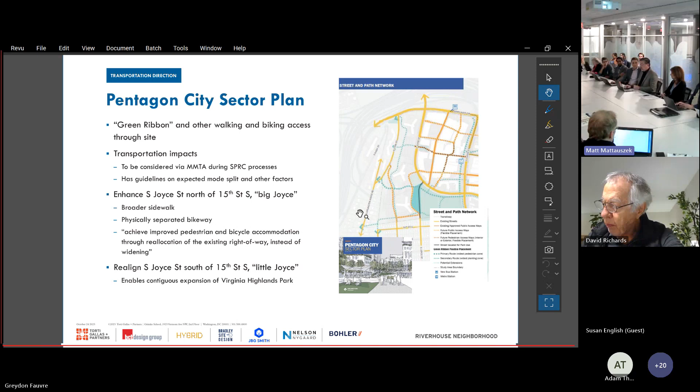I want to note, for folks used to discussing transportation impacts, we're talking about the MMTA, the document describing those impacts and how to mitigate them. The sector plan delineates that that is for the SPRC process. That said, we conducted an MMTA for this entire site because it's a large site—we needed to consider the impacts holistically, and you'll see some implications of that in just a moment. Next slide.

We did counts originally for this project, meaning we had people go out and count the number of vehicles on the street and entering and exiting each RiverHouse driveway, as well as people on foot and on bike, though we're focusing on vehicles here. We did those in 2019, and those continued to show the significant trend the county had documented through 2015.

The county thought it was important to look at more recent counts to support this analysis. So last month, post Labor Day in 2023, post Amazon's return to office, post COVID if that's a thing that exists, we were out in the field doing counts, and they show a continued decrease, in fact, from 2019.

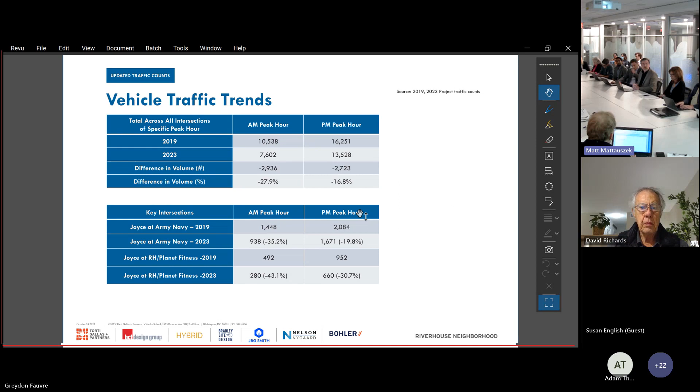The lower box shows for two specific locations - the intersection of Joyce and Army Navy, and Joyce basically at the Planet Fitness across from RiverHouse - even more significant drops, both in the AM peak hour and PM peak hour, ranging from about 20% to more than 40% lower. That's from 2019 to 2023 alone.

Why is that important? Because, as I mentioned, the sector plan guidance calls for looking at the reallocation of street space along what we're calling Big Joyce Street, the segment of Joyce from Army Navy down to 15th Street. The sector plan called for an improved sidewalk, and importantly, a protected two-way cycle track.

We've largely achieved that in this proposed design through the reallocation of existing right-of-way. Not entirely - there is additional right-of-way required on the RiverHouse side - but by reallocating street space, limiting the number of vehicle travel lanes from 4 to 2, along with a center turn lane where needed, we've managed to accommodate the cycle track and other improvements.

You see in the graphics there, reducing the crossing distance for people trying to cross Joyce Street in front of RiverHouse from 52 feet to 32 feet. That's a significantly safer condition. It's also safer because rather than having to cross 2 lanes in each direction of moving traffic, where one car yields and the other doesn't, we avoid those dangerous and speeding conditions.

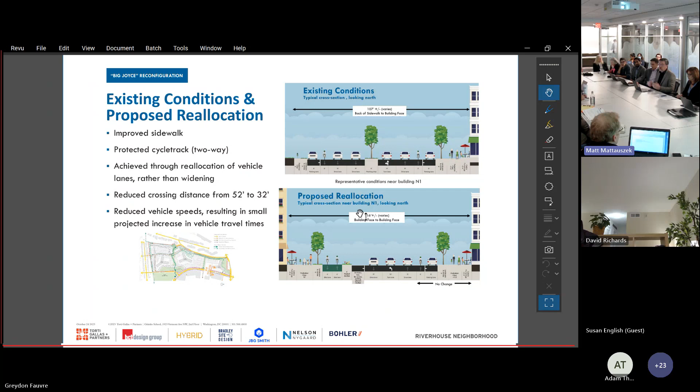The results of our analysis, which used the counts I described and also incorporated all the proposed future sector plan growth in Pentagon City and the proposed future RiverHouse growth, showed that this traffic condition can be accommodated with reductions in vehicle speeds and small associated increases in vehicle travel time - but it's only a few block stretch, so we're talking about a matter of seconds.

The sector plan also called for changes to Little Joyce, as we call it, south of the intersection with 15th Street. That currently cuts off two sections of park to the east and west - Grace Hopper Park, which you're familiar with, and the bulk of Virginia Highlands.

The sector plan called for the realignment of that segment of Little Joyce, and we've accommodated that. It now would intersect under this proposal with basically 14th Street, at the Walgreens, if you're familiar with that. It reads like a driveway, but it would be aligned with 14th Street. And importantly, it enlarges the amount of space available for Virginia Highlands Park.

So what we have is a proposed design in our site plan application, but our project, RiverHouse redevelopment, can proceed with that design. It can proceed with a different design. It could proceed without the relocation of that section of Little Joyce. It could be accommodated with existing driveways and connections.

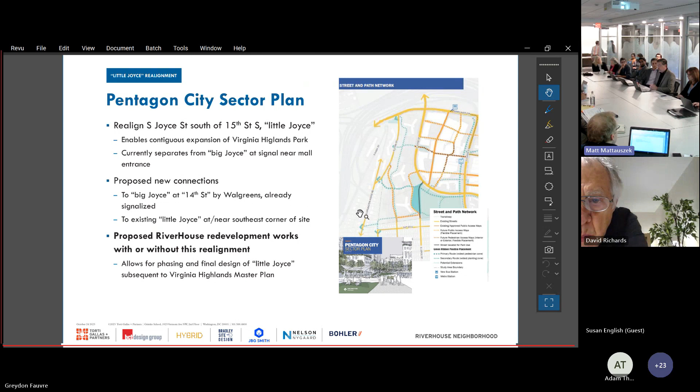So that's essentially how Joyce Street is proposed to change. Here you see the specific cross-section proposed for Little Joyce Street south of 15. So that's all focusing on the Joyce Street edge.

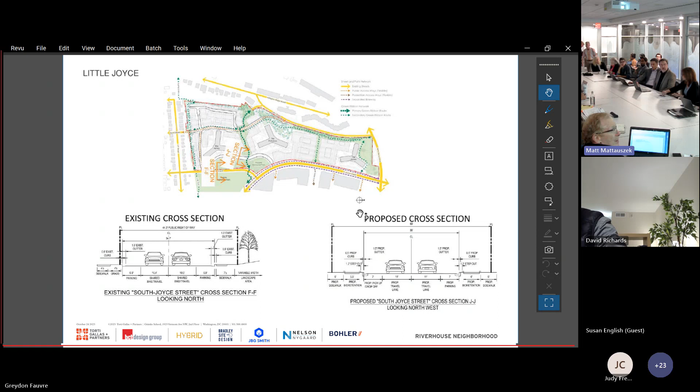Now I'm going to hand it over to Sharon Bradley from the design team to describe all of the pedestrian, bike, and other connections through the site. Thanks, Chris. That's a great segue into other aspects of circulation.

Before we get into new material, I want to do a quick recap. Last time we talked about 4 major design changes. We talked about the southern edge and maintaining that 40-foot southern setback, preserving trees and adding tree canopy to that. We talked about shifting the green ribbon in Land Bay N to more align with Kent Street. We talked about a C3 chamfer and view sheds there, and the removal of the F2 building in the far northeast.

But there were additional questions, and you asked us to study a few things further. So we wanted to dive a little deeper into those aspects today. Today we'll talk about the 15th Street spur and some of the studies we've done since then, the Lynn Street connection, which you had some questions about, and the Land Bay and open space, which we talked a lot about. So we'll go over that more today.

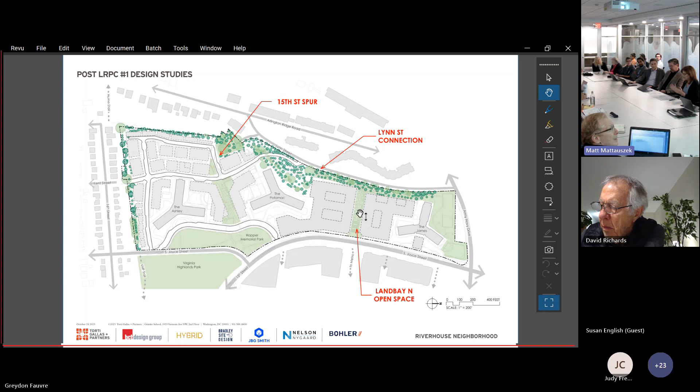So we'll start with the 15th Street spur. Our 4.1 submission, that connection offered the gentlest, most accessible route up the site, up the slope. But where it fell short was its provision for view sheds, east-west. And you asked us to explore that further to see if we can provide those.

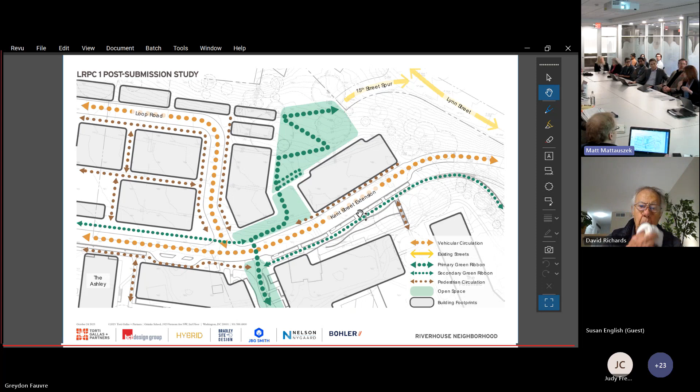So at the last LRPC, we presented a new option that did provide that direct line of sight, but the result was a tighter path that resulted in some switchbacks, which was a less graceful way to navigate that slope. So we've studied that still further, and we've arrived at an option that we're pretty excited about because it offers the best of both worlds.

So moving to Lynn Street, the Lynn Street connection. We wanted to go into a little bit more detail on how we're making that connection to Lynn Street from RiverHouse.

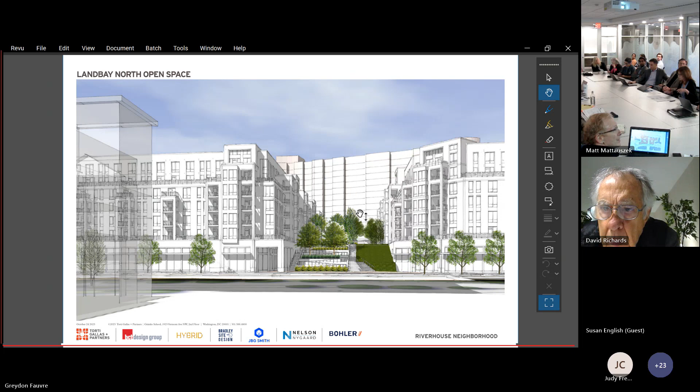The result of this, you see in plan view, is not only a change in visual character, but it's also allowing for a 50% increase in the number of people that you can accommodate in the space. You can see that the chamfer of the northernmost building aligns more evenly with the Pentagon Row buildings to the east. We're going from 67 to 97 now in that space.

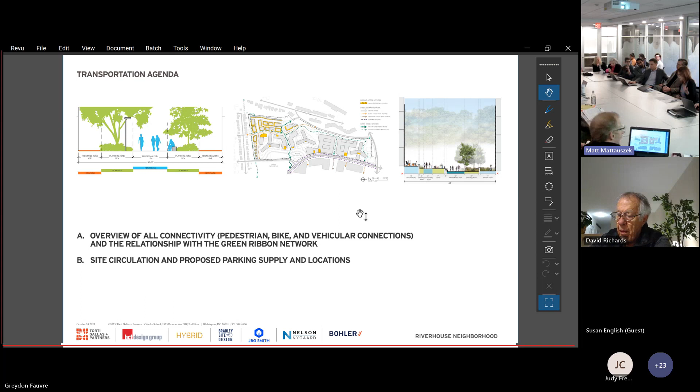So we're going to transition to transportation site-wide. What we've been talking about sets the stage for the discussion around all the transportation elements, and we'll talk more now about overall connectivity across the site. Going back out to the site-wide view, you can see how we're accommodating the sector plan requirements for both the bike and the green ribbon networks.

The plan shows how these networks lay out on the site both individually and in relationship to each other. It also shows how the transportation network is intertwined with the fabric of the open space, and specifically the green ribbon network as an open space.

We've developed the green ribbon corridors in agreement with the sector plan, and we've extracted some of the key elements from the sector plan document. As you can see, we're focused on a green ribbon that is continuous, easy to navigate, and visible. You're going to see these repeated as we talk about how we're designing the green ribbon.

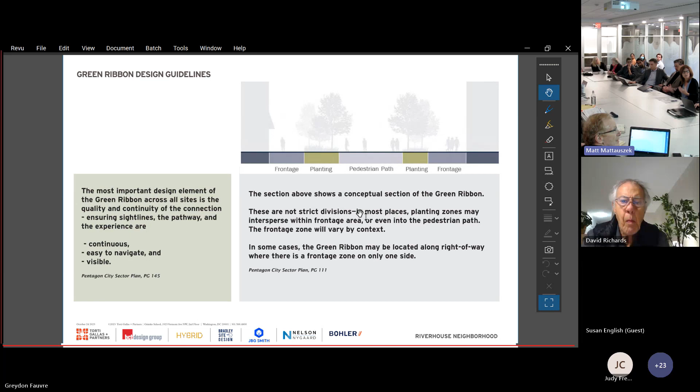We also are going to talk a little bit more about the sector plan mention that it can occur along public rights of way. That's particularly relevant tonight because we're talking about the alignment along Kent, and we know there are a lot of questions around that.

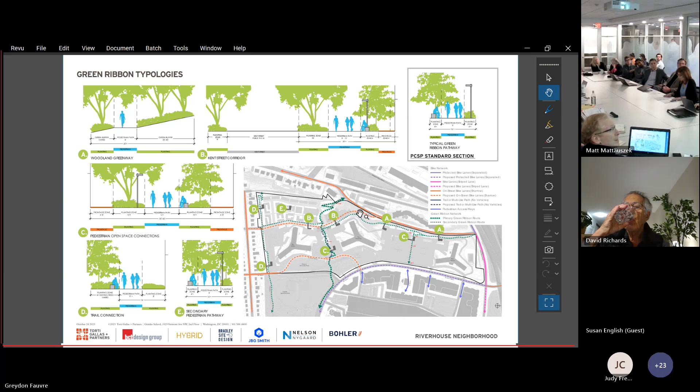Our green ribbon typologies have been developed using as guidance the sector plan standard section that you can see in the upper right. There are a lot of typologies here. I'm not going to go through all of them, but they all meet and usually exceed the sector plan requirements. I want to focus right now on the Kent Street one that you can see in section B.

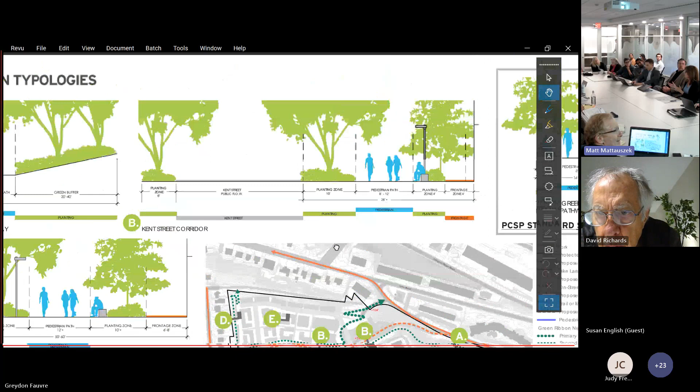The staff asked us to realign the green ribbon so it follows Kent Street. Exploring that further gave us the opportunity to provide a much larger planting zone between the pathway and Kent Street, and a more biophilic experience than you would get on a typical sidewalk.

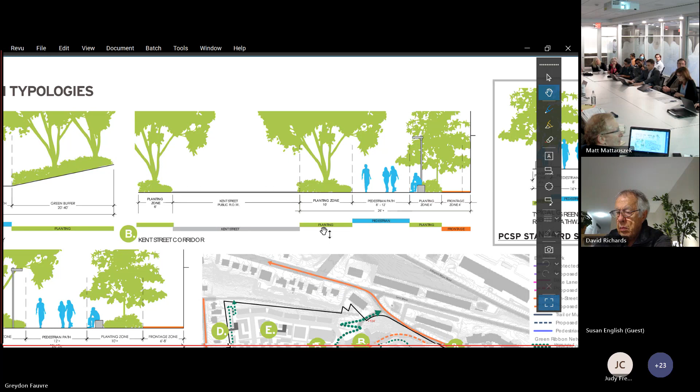The land bay is both an open space and a key section of the green ribbon. The 12-foot bikeway winds through the space and has a separate pedestrian pathway that weaves around it. It has many of the same conditions as Penn Place, so we modeled some of our design thoughts on what's happening there. We have the width to create a safe and inviting space for both pedestrians and cyclists.

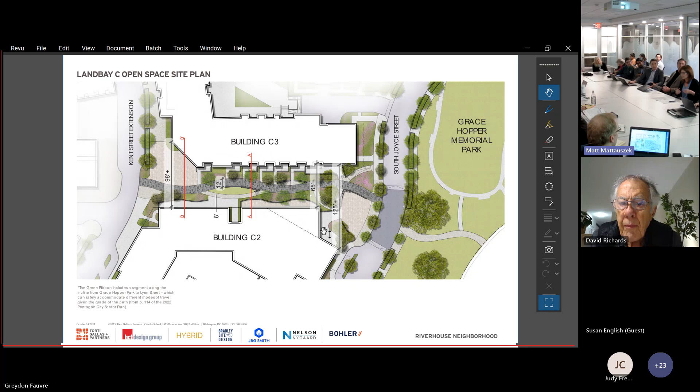Finally, these sections illustrate those dimensions and activities. On the left are the separated pedestrian and cyclist zones in the 65-foot width, and on the right you can see how open and celebratory those wider spaces can be.

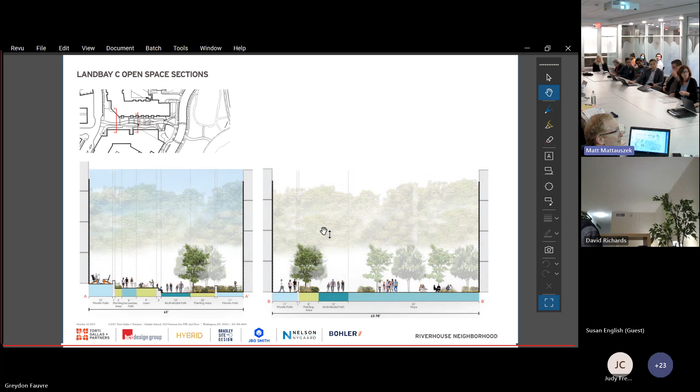With that, I'm going to turn it over to Murphy to talk about other elements of transportation. I could swap with you, sure. That's great. Again, for the record, I'm Murphy Antoine with Torti Gallas and Partners.

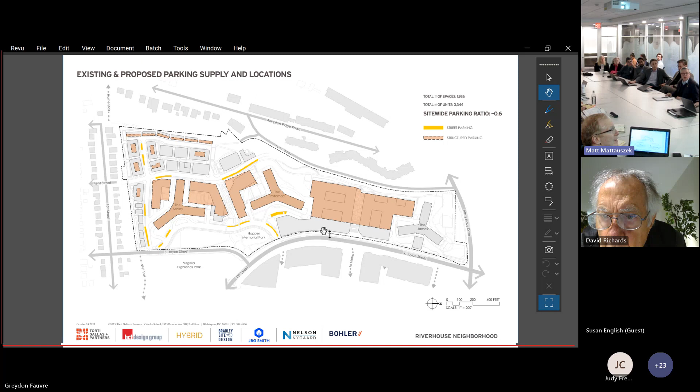In the yellow bands, you see the on-street parking in the new streets along Kent Street Extended, the townhome Loop Road, and Little Joyce. Those garages all have access shown on these diagrams with the orange arrows, into the existing parking at the Potomac and then into those garages between the multifamily buildings in the Central Land Bay and the Northern Land Bay.

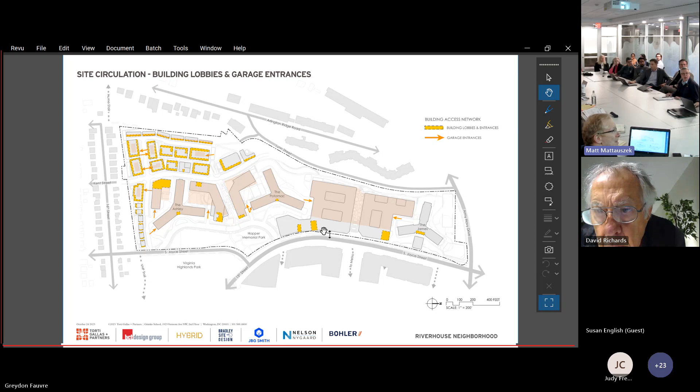On the last slide here, you'll see in the red arrows the loading access. We saw garage access in yellow arrows. Parallel to that, in most cases in the newly proposed buildings, is the loading access, separate but parallel to those garage accesses. In the existing James, Potomac, and Ashley Towers, that loading access is generally behind those buildings, in the back of the hinge.

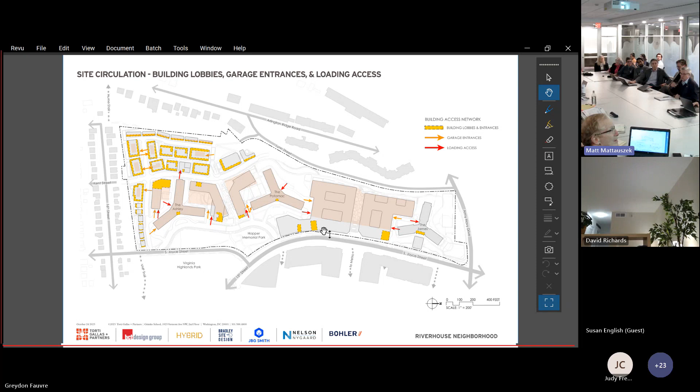Some of the slides I wanted to cover tonight involve some repeat information from the last meeting in September. Looking at the online attendance, we have some folks who were not here last month, so there's some helpful process and overall planning history worth covering before we get into the issues, the review, and next steps.

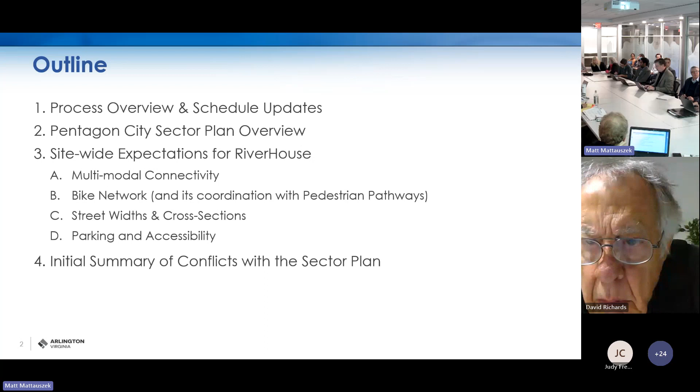I wanted to cover a couple of minor changes from the process slide we looked at last month. The more we peel back this very dense project, the more we learn about the structure of conversations that need to happen. It's also really informed by the feedback we received—a lot of comments and feedback that continue to inform the sequencing of meetings, the sequencing of topics, and help organize this very large application.

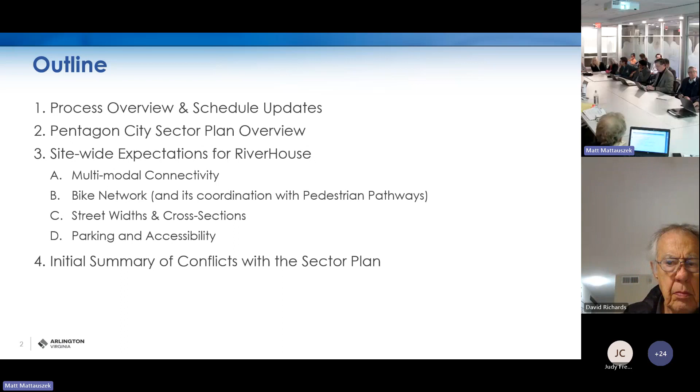For tonight, mirroring what you just heard from the applicant, we wanted to focus on transportation. There's some overlap with public access ways and the Green Ribbon Network discussed last month, but clearly a different set of challenges and elements to review as we focus on accessibility, the street alignment, where parking might be, and really the multimodal character of this property.

This is a long process. We're beginning with the long-range planning committee, which allows us to look at site-wide elements. If we have a productive conversation and feel we're in a good place regarding where the parks, buildings, and streets are generally located, that allows us to proceed into the site plan review committee, where more detail can be focused on the specific buildings.

This is really a combination of online surveys and additional dialogues that drill down with additional stakeholders, in addition to this group, about what we want to see and what the options are for those spaces. It also takes into account what's around the block, so we're not duplicating efforts and are addressing key amenities we want to see as the site develops.

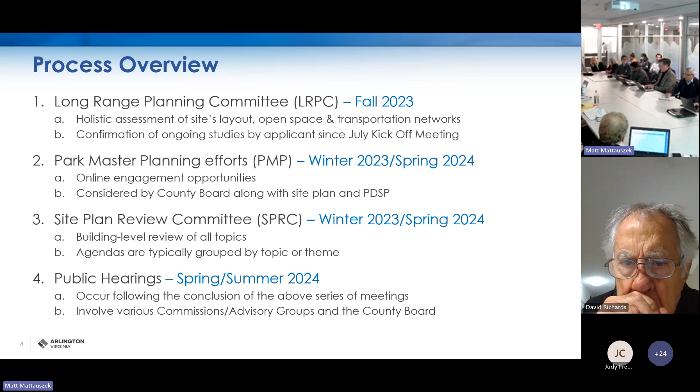Finally, at the bottom of the screen, you can see we have public hearings. This is really what we call the roadshow of commissions and committee hearings that all site plans have to go through on their way to the county board hearing, which at this point will be somewhere in the middle of 2024. But again, it's informed by a lot of the discussions still ahead of us.

We did have a visual that tried to capture all of this in one graphic, but we're getting to a point where we need to break that up into two. So for purposes of simplicity, this one really tries to get at the rest of the calendar year. What are we anticipating through the end of December?

You can see here in yellow, we're highlighting the topics for tonight's discussion, but soon thereafter, in mid-November, we are identifying an additional and what we consider a final long-range planning committee meeting, at which point all of us could really regroup and consider the feedback we received, all the different studies and where they are concluding, possibly from LRPC #1 and tonight's meeting, and really begin to start the transition to the site plan review committee.

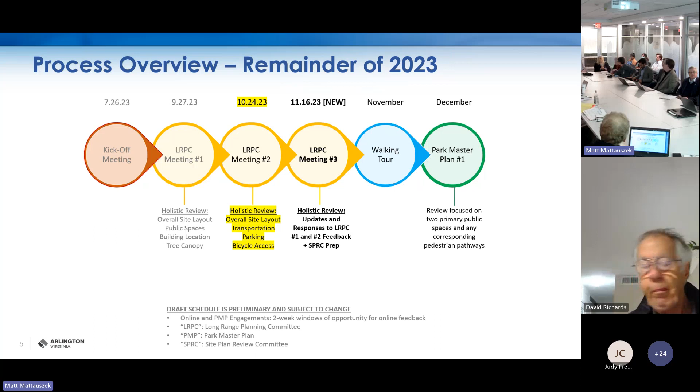So I think there's so much to cover, and I think we've heard a lot, and to the applicant's credit, they are studying a lot of these issues that we really want to have a firm understanding of, the direction we're going into, before we make that transition.

We are also targeting a walking tour of the property. Ideally, if this weather holds up, November would be a good month to schedule that. And as I mentioned, the park master planning effort could begin as early as December with our colleagues in the Department of Parks and Recreation. So that's the end of this year.

Looking at 2024, and again, we're intentionally not identifying any dates because this is still in flux. But in terms of the organization of meetings and topics, this gives you a sense of what we're anticipating, primarily driven by some of the bigger items like transportation, like public space, less so about architecture. But again, we're reviewing what essentially looks like 2 or 3 different site plans in one, because of site size, the number of buildings. So a lot of these items really have to be broken up and separated for us to have a productive conversation.

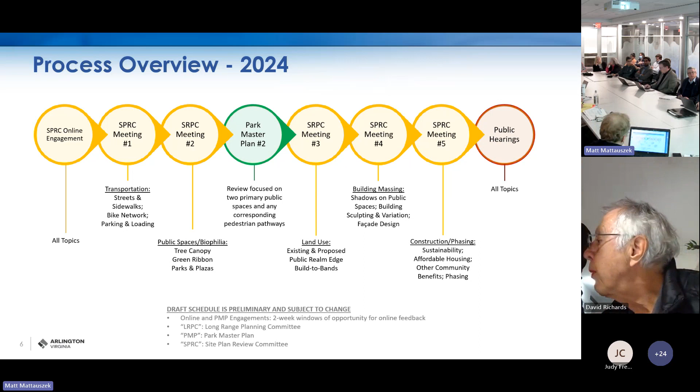Next, I wanted to highlight the adopted policy for the area, particularly the sector plan, and as it relates to this particular property. Those of you that are maybe less familiar, the sector plan was adopted in February 2022 and really sets the stage for how the county board can consider redevelopment applications that still meet the vision we've set for the property and adjacent parcels to the east. So this establishes more of a regulatory framework and conditions under which additional density could be considered.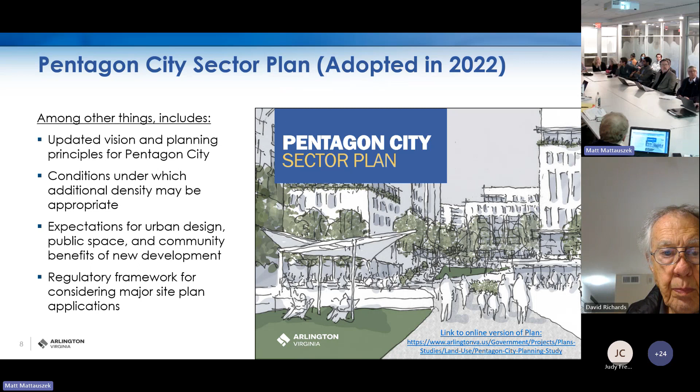We'll get to that as we progress in the slide deck. But one of the key elements we're going to keep returning to is really a set of planning principles that are embedded in the sector plan that kind of represent the livability priorities established back in 2019, if I'm not mistaken. And they really set the parameters for how we should consider trade-offs, ultimate goals and objectives for the property, particularly in areas where there might not be a clear answer.

So I think throughout the process, you're going to see us come back to these 6 planning principles and use them as a guiding light to figure out which direction we should take and how we arrive at some of these recommendations moving forward.

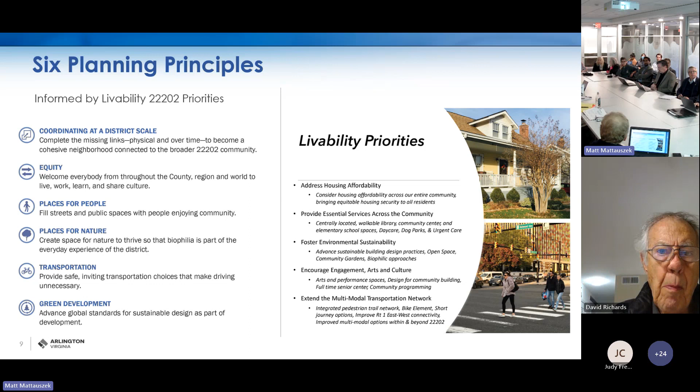The plan itself does have a development framework, which is comprised of 4 key elements. We've looked at 3 of them in the last month. Tonight we're going to be focusing on transportation, but some elements of the other items will creep in as well. This gives you a sense of that document and how it informs both the long-range planning and site plan review committee meetings, given that that's where key recommendations are embedded in terms of what growth could look like on this property.

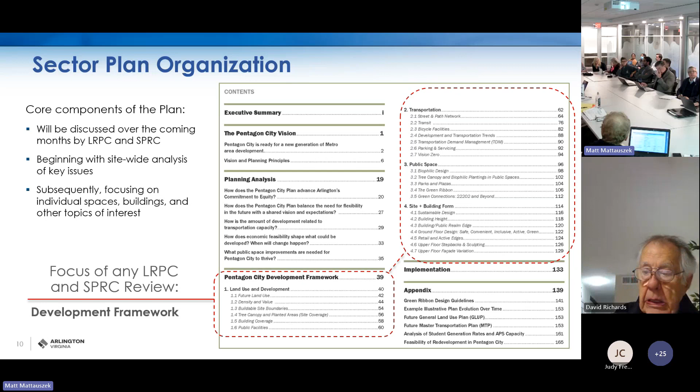As you look through what is a pretty dense document, the sector plan has a combination of illustrative exhibits that are intended to spark inspiration and give people a sense of what could happen, different ways in which the plan can be interpreted. But also, as you see on the right, more explicit exhibits that are intended to be regulatory and specifically guide the vision for each particular property. So as you've seen in last month's meeting, the exhibits we try to focus on the right are the ones that are utilized in staff's review.

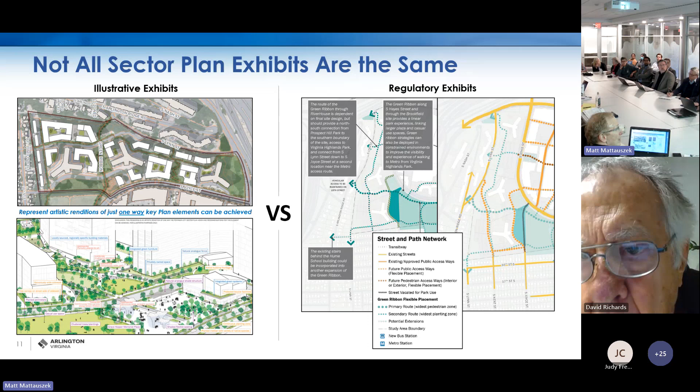Next, we wanted to give you a quick glimpse of what the sector plan speaks to with respect to transportation for the RiverHouse property. This exhibit on the right is an overarching summary of all public access ways and connections anticipated throughout Pentagon City, particularly on the RiverHouse site.

You can see here that in addition to the major arterials surrounding the property, there's a strategic emphasis on improving north-south and east-west connectivity, and doing it in a way that helps us achieve a multimodal success story that allows people to not have to rely on cars, even though cars will have a path to navigate through and around this property, but making sure that whether you're using a bike, walking, or using micromobility, there's a convenient way to get across.

Reach your other destination, and do it in a safe and convenient way. One of the things we continue to highlight is really how these public access ways become intuitive, either through safe lighting, signage, and having a straightforward approach to the alignment that connects some of the key destination points in and around RiverHouse.

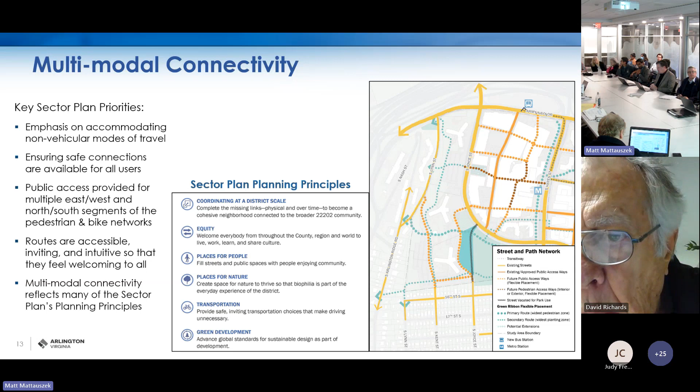One of those pathways is, of course, the bike network. We're going to spend a lot of time at the site plan review committee on this, but for purposes of tonight, trying to see to what degree we want to emphasize the alignment of this network, where we could identify beneficial redundancy in addition to the primary routes indicated on our map, Kent Street, the realigned Joyce Street, and other opportunities, and where that network can share space with vehicles and where it needs to be separated in addition to the pedestrian pathways that exist.

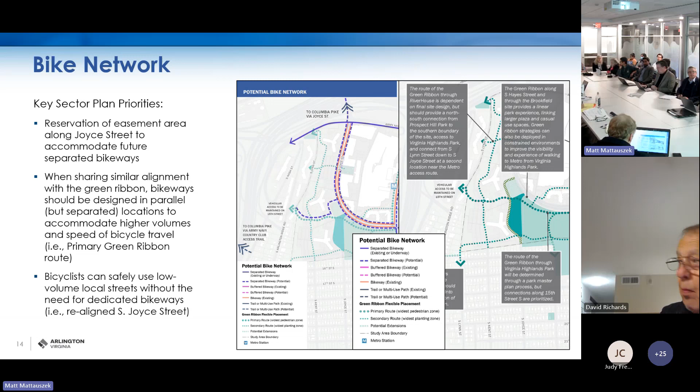Again, going back to the multimodal success story, where should sidewalks be? How wide should they be? To make sure that people feel safe and have multiple opportunities to navigate through the area.

And then finally, our last series of slides looks at where initially I think some more information could be beneficial and where staff is developing some initial questions as we review this application. So this is going to start from the south, working our way to the north.

On the southern land bay, I think there's a number of sidewalks that are not reaching some of the anticipated widths that we've had. This is a tricky conversation because there are some additional and redundant connectivity opportunities here that were not anticipated or expressed in the sector plan. And I think that opens up the conversation to what is the appropriate width.

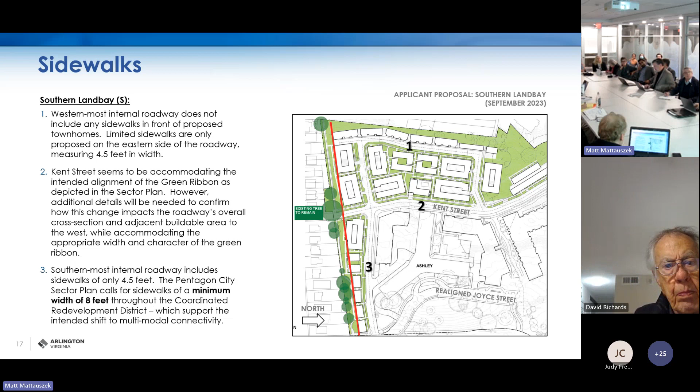In addition to the sector plan, which does include an 8-foot minimum for clear sidewalks, staff is also referencing the master transportation plan pedestrian element, which does have, I believe, a 5-foot wide clear sidewalk. So where we fall within that and where we think necessary adjustments are needed is really what we want to hear from you all, particularly where you see the number 1, where on the western side of that roadway we don't have any sidewalks right now. So that's something we just want to clarify and have a conversation around.

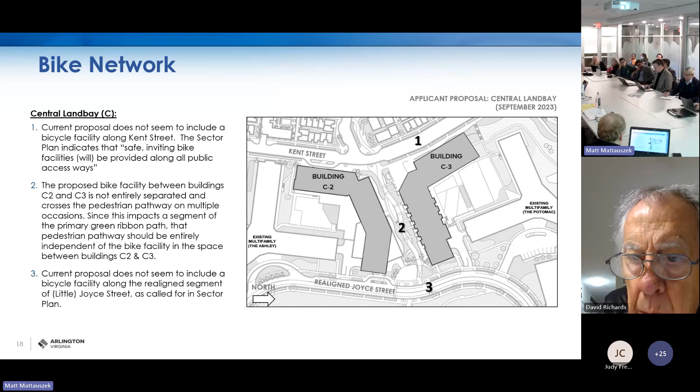And I think probably most importantly for tonight's purposes is number 2, where the primary green ribbon pathway intersects with the bike network. And what is that relationship like? And any adjustments we feel are necessary based on what the applicant has proposed.

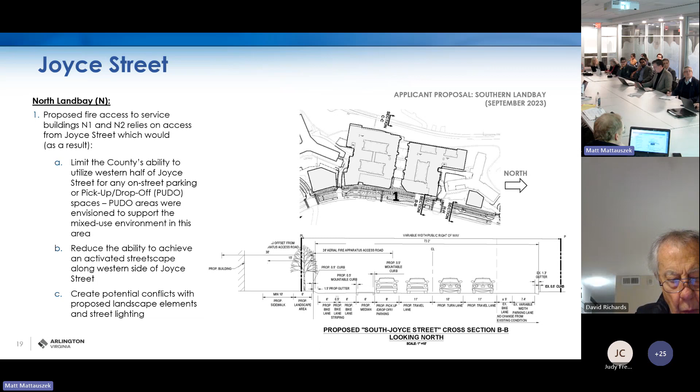And lastly, this is on the northern side, more for awareness, that the applicant is continually working with the fire marshal and our staff in the Department of Environmental Services, evaluating the opportunities that exist for achieving fire access, but doing so in a way that doesn't impact some of the other elements we want to achieve along Joyce Street—pickup drop-off areas, on-street parking, street trees—and doing so in a way that meets our goals, both in the sector plan and the MTP, as well as satisfying the fire marshal in this case. So that's something we're going to continue to look at as we get into SPRC.

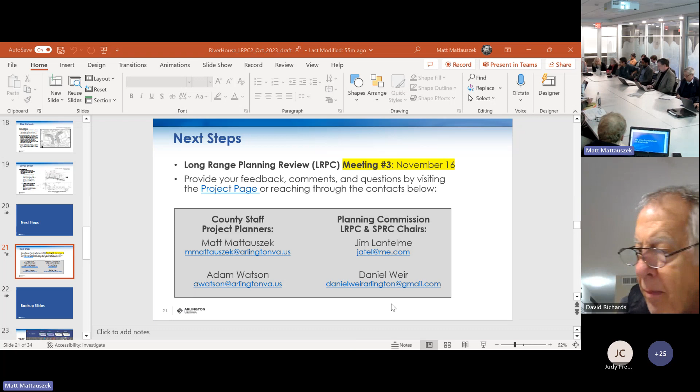Good, thank you, Matt. So it's now with the committee for discussion, and as Matt mentioned, transportation is going to be our focus tonight. I'd prefer we not get into changes raised by the applicant yet. First let's talk about transportation; if we have time after, we can get into those, otherwise it'll be at the next meeting. So starting with transportation, we can go around the room, or does anybody have something they'd like to jump in with right away?

Okay, Pam. Sidewalks. Am I correct that on Big Joyce you're planning a 10-foot clear zone? I believe so, which is wonderful. Thank you. I'm very concerned that when it gets to Little Joyce, it's a 6-foot clear zone, because that's a continuation of this major pedestrian passageway. All of us who live in the area use that side of Joyce to get over to Pentagon City. So I strongly encourage you to get to the 8-foot that the county is proposing.

And for the sidewalks on the internal section, south, we need sidewalks on all sides, and if you can get to 8 feet, that would be great. And it looks like in one of your sketches you've actually successfully combined the green ribbon and Kent, and that looks great. I'm impressed, thank you.

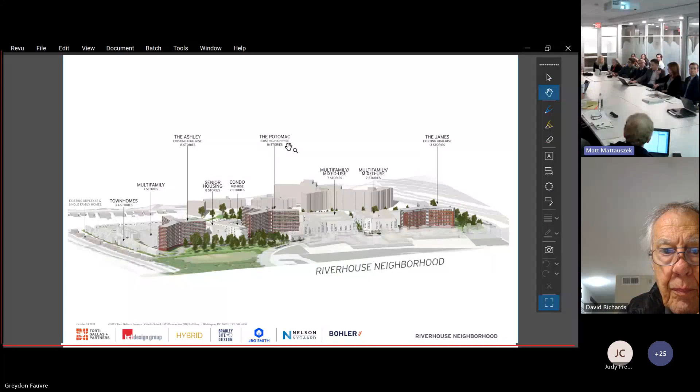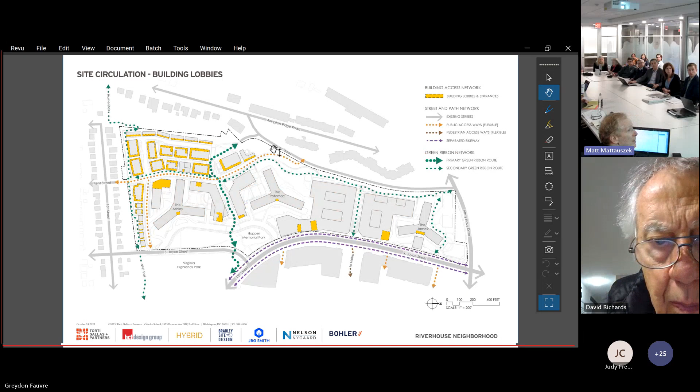I do want to point out that the arc to the bus stop is not part of the green ribbon—that's in addition, a circulation enhancement separate from the green ribbon. But isn't there a piece of the green ribbon that runs just east of it, and then cuts through the end buildings? Correct, it does both. So this drawing just didn't show your additional stair there, and I think some of the other ones still had the old stair connected.

And so I just wanted to confirm - there we go. So right there, you still kind of have that old one, but make sure that flow continues. The old stair is going to go away, is that correct? Correct. Yeah, that's a much better ascent to Lynn Street than the new proposed stair. It's safer.

So there's now just the one staircase and the one crosswalk? Right, it would be this one, that would be the new one. The old one was here. No, other way, this one is the new one. The purple dot is the bus stop.

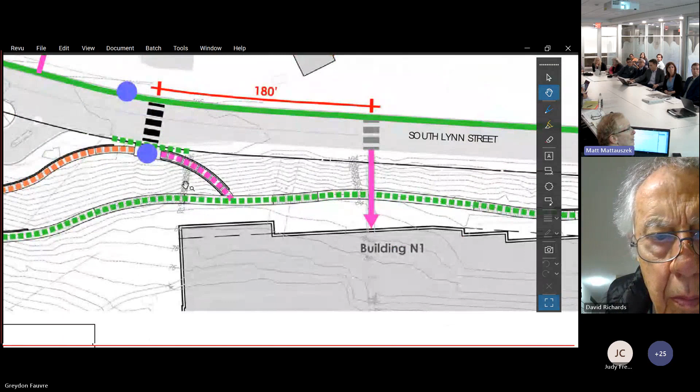Yeah, I actually thought the same thing. These are actually not a stair - these are the labels of the changes in topography, that's how steep the topography is. These are literally contours, those are numbers - the mapping person I know. The contour line shows how dense the grade is there. So that's actually the contour lines.

This is the existing stair location and existing crosswalk location. And this is the proposed new crosswalk location, which would have the more gracious stairs as well as an alternative ADA compliant access, and be affiliated with the bus stop.

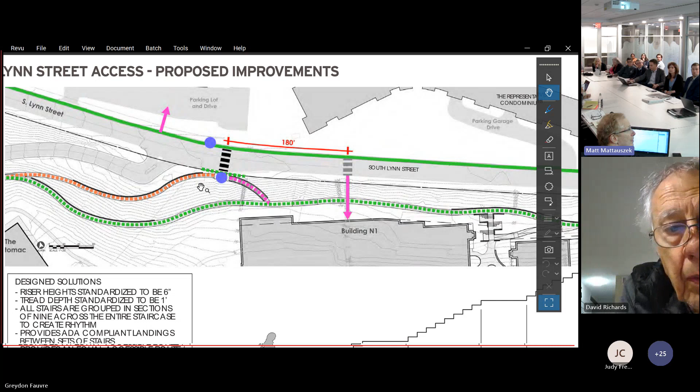Yeah, exactly. And then, are you putting sidewalks on this side of Lynn too, here, to accommodate sort of a resting area or anything? Because I know there's no sidewalk here right now. Correct, yeah, there's no sidewalk. There's sort of a landing spot for that bus stop. And that's what we would maintain and provide the access to.

And you can't do the entire sidewalk. I think not at the expense of a lot of foliage - that would take out a tremendous amount. Forested edge comes really very close, as you probably know. And I think it drops off ultimately to be sort of redundant with this section of the Green Ribbon that's providing that north-south connectivity.

I'm just looking at the stairs. Theoretically, if you extended that stairway connection so that it joined further to the north, you could have longer landing areas, a lower overall slope going down that hill, potentially even ramping, so that it may be connected closer to the junction, because people are going to walk down that path and they're heading, most of them, down to the area between the parks. So you don't have to get down to the Green Ribbon as quickly. I don't know what that does for the park area, but...

Our main consideration there with the alignment was the existing trees - spreading between existing trees and the bus stop, and getting to the bus stop on its route going eastward was really dependent partially on the trees, with fewer trees impacted by just getting down to the Green Ribbon. Correct.

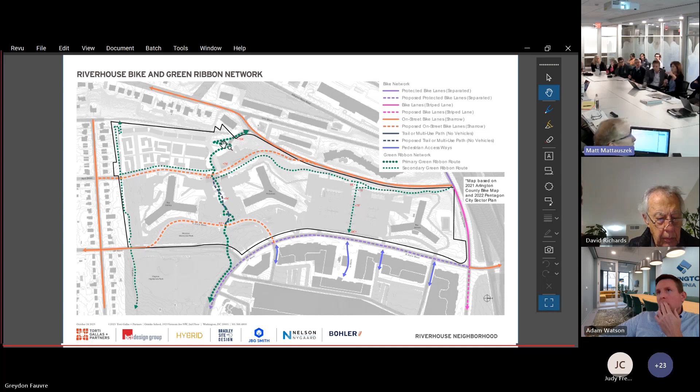That one is fine for bikes, on a separate track. Between the central land bay buildings, there was a 12-foot pathway for cyclists and a separate 6-foot pathway for pedestrians. Is it thought that the Woodland Greenway will accommodate cyclists, or is that mostly pedestrian? It's supposed to be multimodal, so it can accommodate both.

But to come back to your question around this section here, we need to be specific on how we're describing it. We have the width where we could do the type of separated cycle track that we have on Joyce Street, with a true physical barrier separating cyclists from the rest of traffic. We had a similar question arise on Penn Place, with that first section of the green ribbon going through the plaza there.

Routed through Penn Place, the solution we settled on was a shared multimodal use path, because we didn't feel on that site plan, and I wouldn't feel on this one either, that there's the same need for a physical barrier for cyclists. So it is a shared multimodal use path going through that open space, not a physically separated cycle track like we have on Joyce Street.

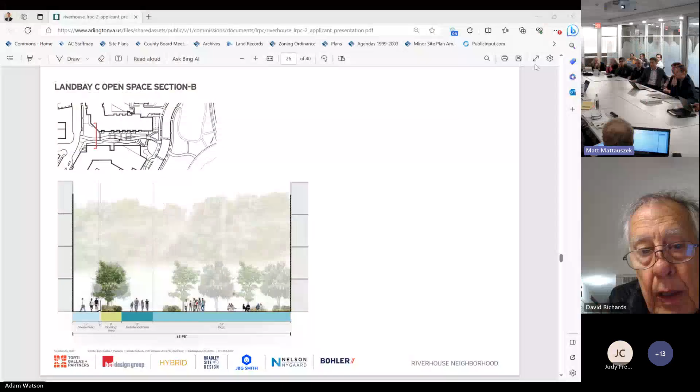I know Transportation Commission might have more comments on this. Sure, there's definitely room to discuss, since according to the sector plan it called for dedicated bike paths, so trying to lump it in with pedestrian paths may cause some problems.

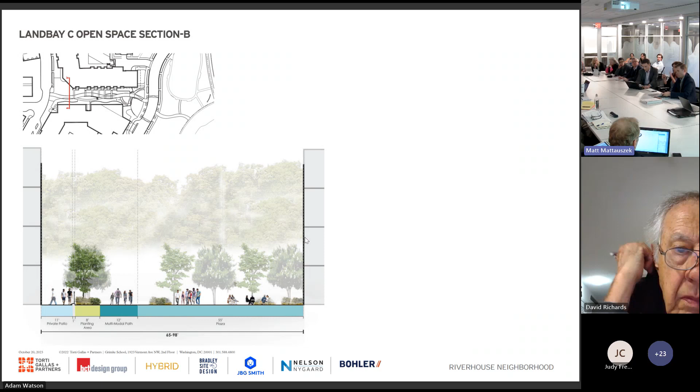This is the section, right? Correct, in the presentation. So that's between the two, C3 and C2 buildings. There's another one that shows the two different paths - they weave back and forth because we wanted to provide some separation, so there is respite if people do not want to interact very much. They cross twice.

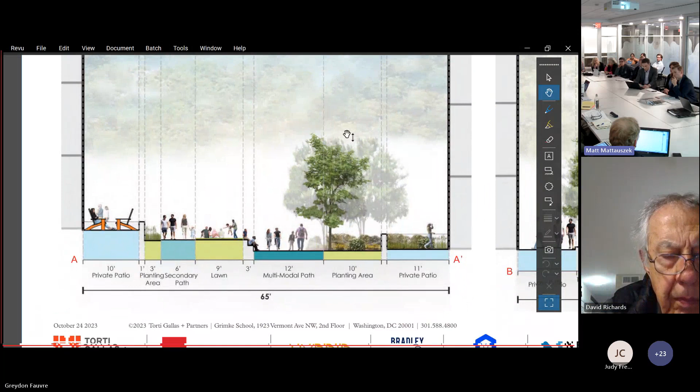And I think that might be fine - after all, we don't expect cyclists to be speeding along like some speed track type of thing. But as long as it is physically separated from pedestrian spaces, so there's not constant collision potential every 5 feet or so. We felt that given the streets at either end, east and west of this space, you're not going to be at high speeds as a cyclist - it wouldn't be appropriate.

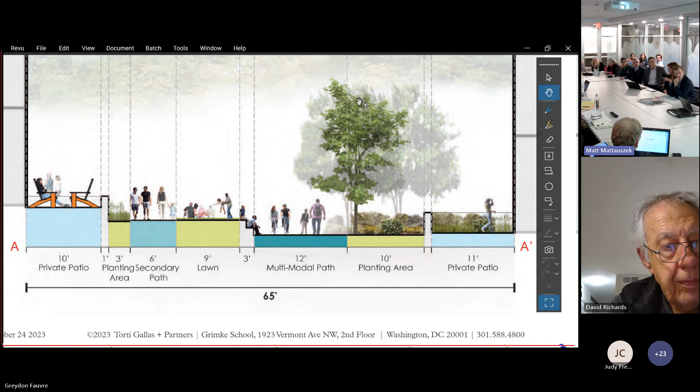So recreational cycling on that 12-foot multimodal path - we're showing both because we do feel this could accommodate both. But there is also that 6-foot secondary path on the left. In the plan view, you can see how those interact: the darker gray is the 12-foot path, and the lighter gray is the pedestrian path with areas of respite where you could sit at a bench off the cycling path.

They're also separated from each other in a lot of places vertically, as the section showed. Part of that's by necessity, because the multimodal path can have steeper grade, but the pedestrian path, to ensure it's ADA accessible, has to have a few more switchbacks. We wanted to avoid switchbacks through that space - we couldn't avoid them at the far east end, but everything else is less than 5%, so we're not creating true ramps, handrails, and all that visual clutter.

It's sort of universal accessibility moving through the space. What happens west of Kent? Is that still a multi-use path? Yes, it moves - that's the 15th Street spur study that we did. How wide is that? That's 8 feet minimum.

Okay, and again, there's no separation of the multimodal there, right? There isn't. Going up this, we'd have to lose a lot of trees, and it's separately steep. You're not going to be going fast. What kind of grade is that? Once you get it, it's about 15% if you were to go straight up the slope.

But with the current switchbacks, it's less than 5%, no true ramps. But it's a tricky thing for a bike to do a switchback. Right, it's a gentle curve, it's not folded back on itself, and that's what we were trying to get.

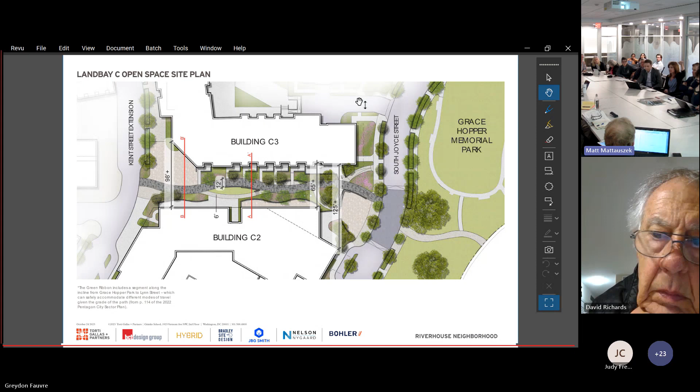So is it likely that a cyclist going between the C buildings, when they get to Kent, rather than knowing that they have these switchbacks ahead, are they just going to take a right and go up Kent to Lynn? It probably depends on the cyclist, right? The serious cyclist is going to take the right.

You know, the casual bike rider might decide, you know what, I'll wait till they get to the first switchback. And then they're pushing their bike. But they might walk it up the way. Okay, yeah, all right.

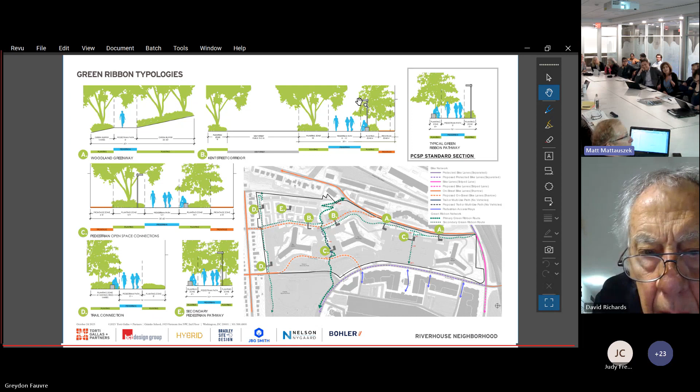And the orange dots that you see on this plan indicate a sharrow, which we have a lot of in the shared road, because again it's a slow speed road. And many of the other roads in the county are considered appropriate for this, and we thought that Kent Street extended and Joyce realigned would be appropriate travel speeds to accommodate that.

Does the sharrow imply that there's a marking on the pavement to say you're sharing with a bike? I think so - should have a sharrow mark. It looks like little mountains, yeah. It's just arrows.

So it gets into, I think, site plan type details.

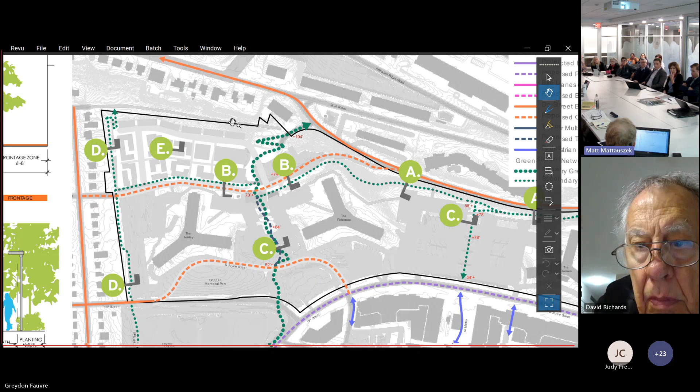Thank you, Mr. Chair. I was just wondering, from a transportation and circulation perspective, whether in developing this project or others, particularly down there in Crystal City and Pentagon City, there is an analysis done of the juxtaposition of pedestrian rights of way, the sidewalks, versus the micromobility and bicycle lanes versus the vehicular way.

In terms of how a pedestrian, whether with a disability or without a disability, is able to have a taxi or a rideshare vehicle, or just somebody driving them home or driving them to work, let them off without presenting hazards for people with disabilities.

And then I'm also interested in whether you look at the neighborhood and how a pedestrian is going to cross through all the mix of the various transportation lanes to get to essential services, like a new apartment or residential project, so that you can get to the subway or wherever. Because my perception as a new resident of Crystal City, actually during the workday, because I work down there now, is that it is pretty difficult, obstacle laden for people with physical disabilities and sensory disabilities to navigate when somebody is letting them off, but also just to navigate the streets.

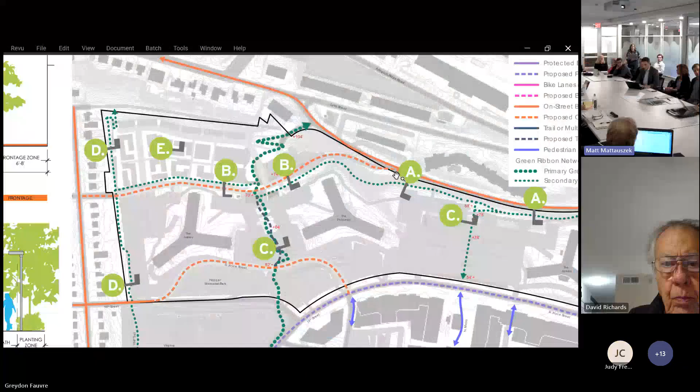If we can go to the applicant's slide 6, we have a question about the 15th Street spur. If you look at the top where the arrowhead is — you were just there — at the very top of the green arrow where it says 15th Street spur, that path is right outside our garages, which are our only means of ingress and egress to the building. It's not just for our cars; it's where our trash and recycling is picked up, and where we have passenger loading, unloading, and deliveries. The way that looks, it seems the green dotted line is feeding into that. What are you doing to mitigate conflicts between traffic coming in and out of our building and folks biking or walking up? Is it going to be tapered? Are you putting a speed bump there, maybe a gate, something to that effect? Because we certainly don't want to hit even our own folks. We want this connectivity so we can walk to West Coast, walk to the metro — we're not against the pathway, but we're very concerned; you don't want to hit anybody.

So that's question 1. I don't think you want me to hear all my questions. You're going to answer them one by one, but that's our first question.

Great question, I'll probably turn that over to Sharon. First, thank you for raising that the previous times we visited. Definitely something we want to make sure we avoid those conflicts.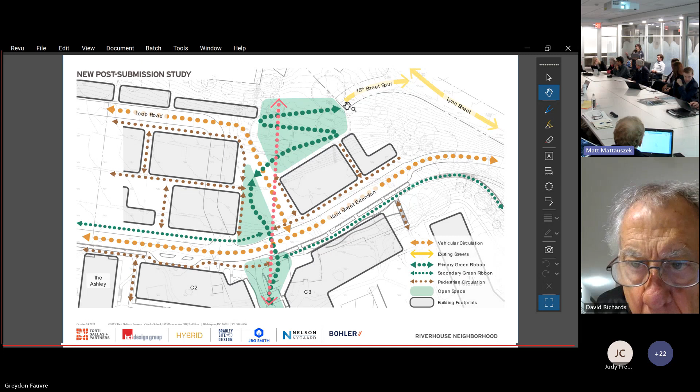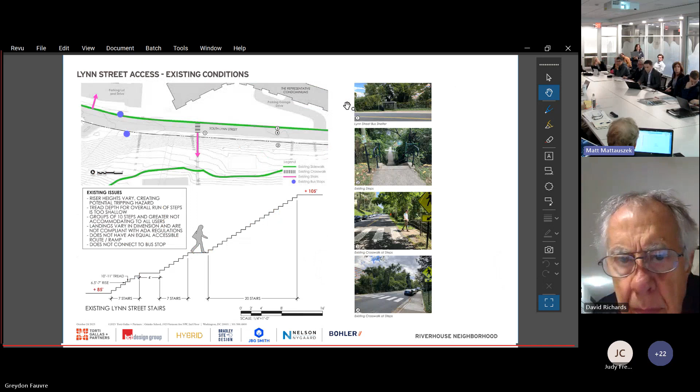The second concern is about the bus stops on South Lynn Street. There is a bus stop, 10E, right in front of our building, and just a few feet later is the shelter. I'm talking about the east side of South Lynn Street heading east. In front of Pentagon Ridge Condominium, there's a bus stop 10E directly in front of us, then another one a few feet later at the bus shelter, and then even a few feet beyond that.

So there are three stops very close together. Have you had any conversations with WMATA about consolidating a couple of those stops, like perhaps removing the one in front of our building? It gets very little usage, and even that bus shelter gets very little usage. I don't know if you have statistics, but as someone who's lived there for 23 years on both sides of Lynn Street, I do think we should have a bus stop and it should be accessible, but having three within so many feet—I think even someone with physical challenges would say that's too many stops in too short a span.

We have not had those conversations with WMATA. Generally, I'm not going to have a lot of success convincing them to remove one of their stops, but we're going to need to have some coordination with them. Happy to get information on that as we go through the process.

Is this something DES would be involved in, Chief? Yeah, we could look at potential stop consolidation. I believe the comments on the site plan application include some from our transit team, which may or may not be relevant to this particular discussion, but could lead to a more productive discussion.

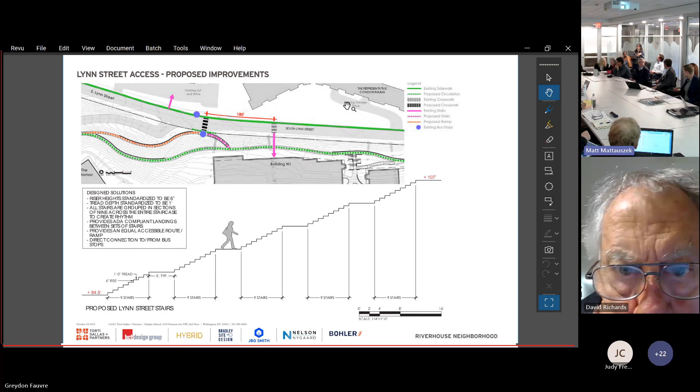Also, there are currently some pedestrian sidewalk and crosswalk improvements on Arlington Ridge Road and Lynn Street, which have made that 10E bus stop in front of Pentagon Ridge less practical. The bus doesn't have much room to pull over, and it will back up all the traffic on the eastbound side of South Arlington Ridge Road.

So now the third of the four questions, looking at the RiverHouse site specifically, has to do with ride sharing and car sharing. For ride sharing, if you go to especially the Potomac on a Friday night or Saturday night, it is just Ubers picking up and dropping off, which is great, we don't want a lot of cars, but it's very hard if you're a pedestrian to walk to West Post, navigating these Ubers and Lyfts.

Are you going to have pull-offs so they can do safe pickup and drop-off of ride-sharing passengers? And the second part of that question: years ago there was Zipcar, and I know Zipcar isn't operating right now in Arlington County, but if car sharing comes back, because we want to be car light if not car free, are you going to reserve some spots, because there used to be spots on RiverHouse property for Zipcar and Car2Go? So it's the ride sharing and the car sharing question, do you have comments about that?

Yeah, so on the rideshare pickup drop off, I know we're going to get grilled on that. Yes, we have done some analysis and have some thoughts on where those pickup drop off locations can go. We'd love to reserve a lot of the existing lay-by that we have for the existing buildings, because that functions well for that purpose. And for the new buildings, we're thinking about where those can go, including alternatives to the public right of way.

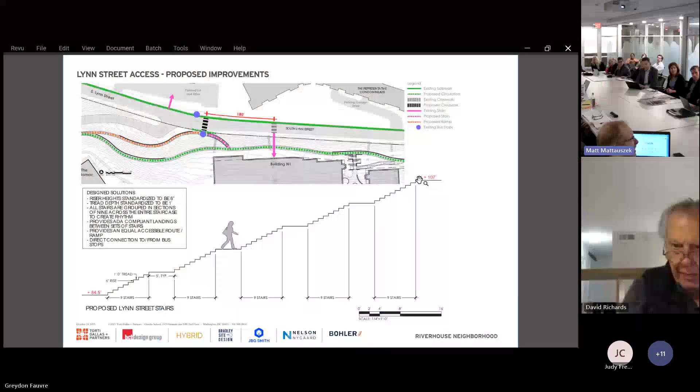So this is as it relates to -- let me just pull up our site plan here. You know, we have to either start making our PDFs hyper dark and contrasted, or the screen has to get fixed, because everything is so washed out on this. I think it's the screen. So I think we just need to make, well, I mean, usually by the county the screen, yeah, you're gonna be -- it's a fair point.

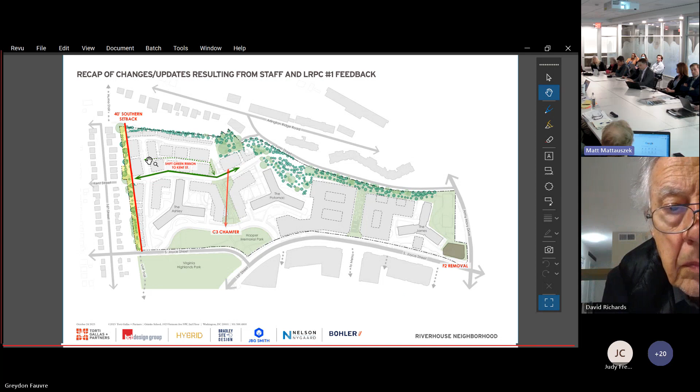This access road that I'm literally tracing here really just serves these townhomes and provides access to the various parking garages within the townhomes. And I think it's a great idea, and one we're looking at too, is how do we make that something not just asphalt, and make it a shared space. There are probably going to be successful precedents for this, and other FedEx and UPS trucks on there all the time too, so it has to accommodate that. I think Matt said it really nicely, that we want to accommodate vehicles, but not design around them.

I guess, I love that.

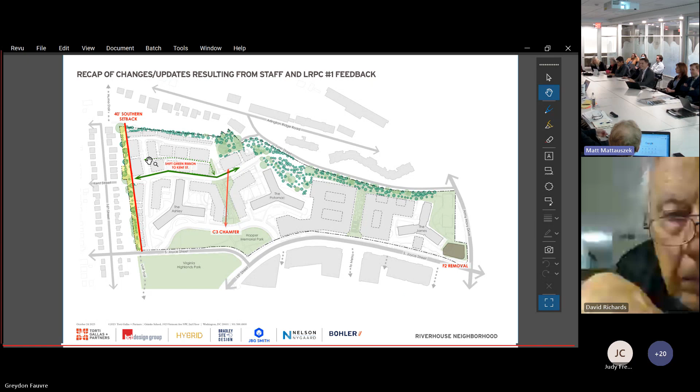Hi, Nick Jacoby from Aurora Highlands. I have a transition question. Joyce Street, as it's redesigned, is very different from the way it is now. How does that then transition into 15th Street, which doesn't seem to be redesigned? Or is the county undertaking a separate redesign of the 15th Street side to meet up with Joyce Street?

So there is a capital project for 15th Street. However, given the new cross-section for Joyce with this site plan, there are now, on the county side, some discussions happening about the current plan to just be a marking improvement until we have enough funding to then complete 15th to match what's being done on Joyce with the private development. I think the big benefit would be a continuous cycle track down 15th, whereas the interim condition would require a split facility. But ultimately we are looking to see if that is a feasible option, given funding and timing and all of the things that go into deciding the capital project side of things.

But we are internally discussing the vision for 15th, given that this project is now coming. The planning for the current project started 10 years ago, and so now that we know what's happening, we want to make sure the county is not going to build something that's not compatible with something else, but also to provide an interim condition that allows a smooth transition between the new and the existing. So you might cut some of the lanes there on 15th as well. We may look to do that.

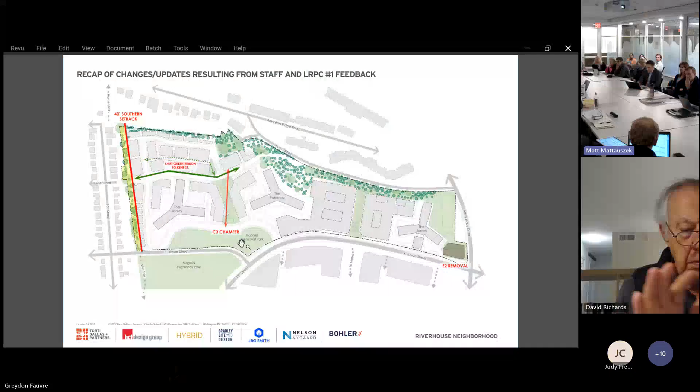I am interested, however, with the little Joyce or whatever we're calling it. How do those bike lanes transition from the protected ones? Are they going to continue into that, or are bicyclists now going to be sent a new way through the green ribbon, although I feel like people still want to go south or north. I was a little confused by how that would work out.

I don't know if Chris was sharing with you on anything, but it's a two-way protected cycle track along South Joyce Street. And then Little Joyce, as of right now, that's anticipated to be a shared, low-speed road, so bikes and cars are sharing that same road.

So that would not even be a bike lane at all? A Sharrow along Little Joyce? I assume that's the northernmost part, is that what you're about to say? I was wondering about the side view I saw earlier. I thought that was Little Joyce. That wasn't Little Joyce, that was Big Joyce?

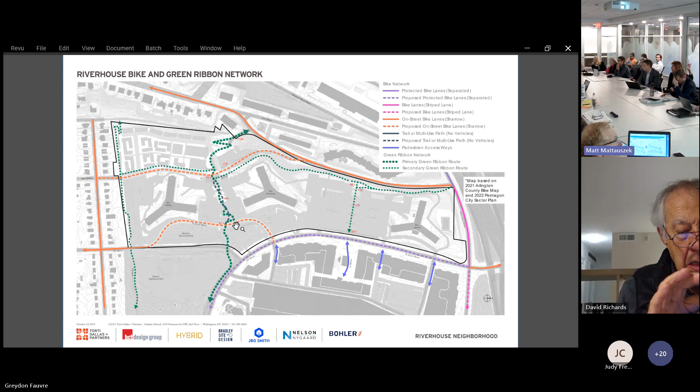There was a little spur projected there, so the sector dedicated bike plan does show a little spur between Big Joyce and, I'll call it, the green ribbon, right here. I believe it's in the comments we sent yesterday, that we are looking to see some sort of continual facility for that spur. But then south of the green ribbon, a Sharrow or some other low-tech infrastructure would be appropriate. So I think we are still in discussion.

Because the sector plan does call out that spur, we do want to make sure that people coming off of Big Joyce, kind of having them go towards the green ribbon, is a little bit preferred. I think we will continue the conversation.

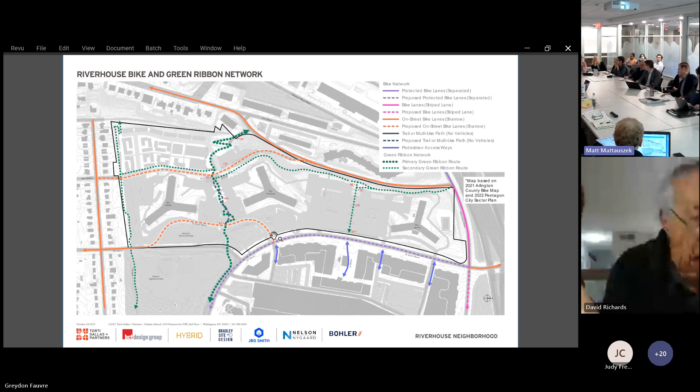My two cents: Sharrows are to be avoided wherever we can, especially here, since we have a very dense urban area of all of National Landing. So avoiding Sharrows within the entire border of National Landing is something we should really try very hard to accomplish.

I'll say that the existing and projected future traffic volumes on the section of Little Joyce south of the Green Ribbon, and even north of the Green Ribbon, are so low. They're much closer to the traffic counts on Joyce Street as it goes down into Aurora Highlands. But we heard the comments, and we'll study adding protected cycle track there, or a protected bike facility.

In that spur you're saying, and this then maybe turns into a non-protected facility right here after.

I just want to concur with your comments, Jim, and say volume data is appreciated, but it's not just volume, it's intensity of the use. I was actually sharing with Daniel, I feel more dangerous on quiet residential streets often than on busier streets, because cars will just blow right through and are less concerned, versus busier streets where they have to be more vigilant. So as somebody who cycles a lot, I'm more scared of single family neighborhood streets often. I would appreciate avoiding Sharrows. Thanks.

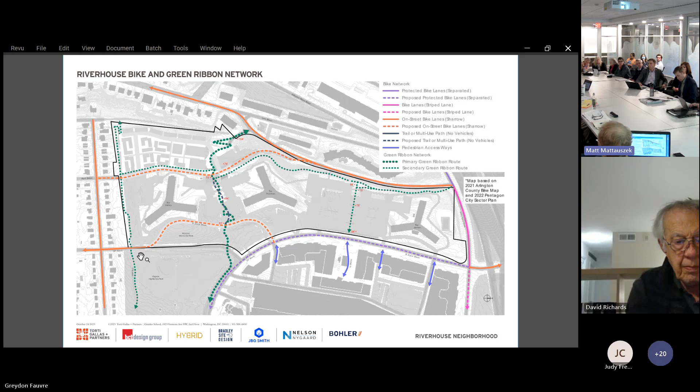Also, I'll note on the Sharrows on the part of Little Joyce south of the green ribbon, I believe that's the part of the new rerouted Joyce Street, which would go right up next to the southernmost RiverHouse building, basically that pull-up, pickup drop-off spot. Sharrows would be a disaster right there. So many vehicles, even if it's low volume, just coming right in to pick up and drop off people right at the building, that'd be a disaster.

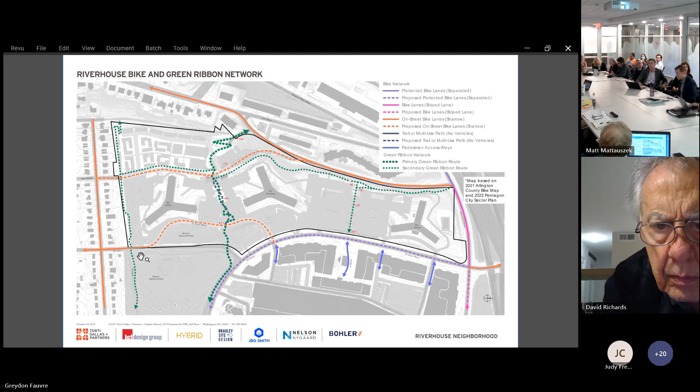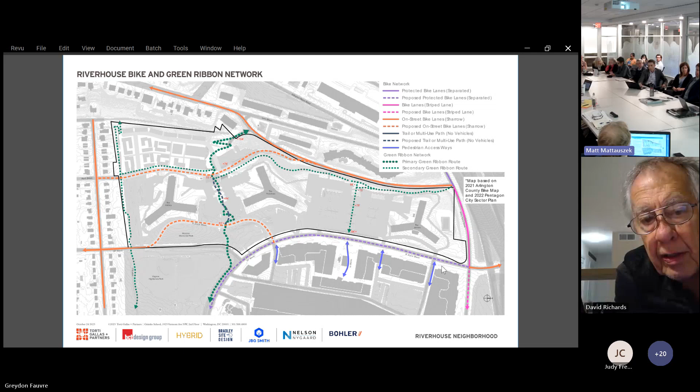Is low speed street the term that's been used to describe Little Joyce? Is that a defined term? I think they said low volume. I think MTP-wise it would be a non-arterial neighborhood street, so Little Joyce would most likely have a 25 mph speed cap.

I want to echo Eric's sentiment on that. I don't think anyone's going to think that's safe. If it's treated just like 9th Street a block east of us, it doesn't feel safe now, so it's not going to feel safer. Not for any modality, but certainly not for bikes.

But Joyce is so narrow, and you've got people parking on both sides, so cars can't even go both ways - one has to stop and let the other through. I'm fine with a yield street, but there's no place for bikes at all. What I'm not fine with is a street wide enough to not be a yield street, and not have any facilities.

Especially if there's any kind of topography. I was almost in a head-on this morning because a vehicle was coming up a crest at 35 miles an hour, dead center of a street that was wide enough that kind of thing was tempting to do. So that's more of a comment in the direction of DES staff than the applicant.